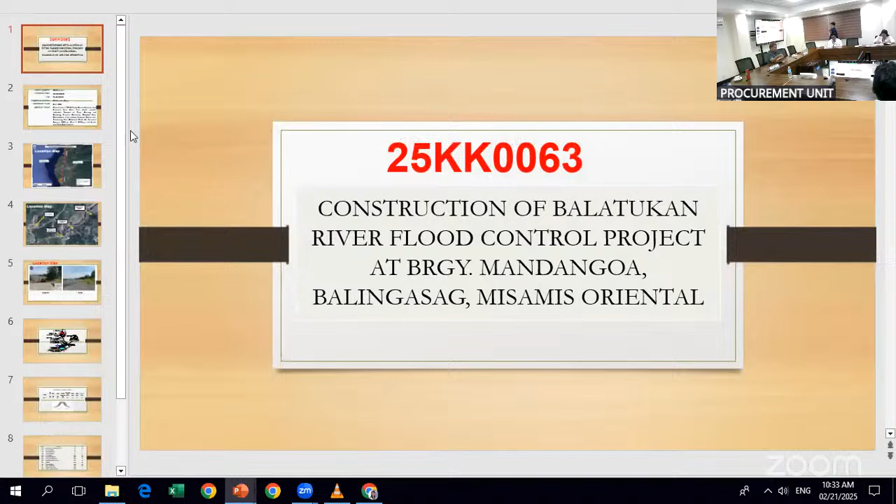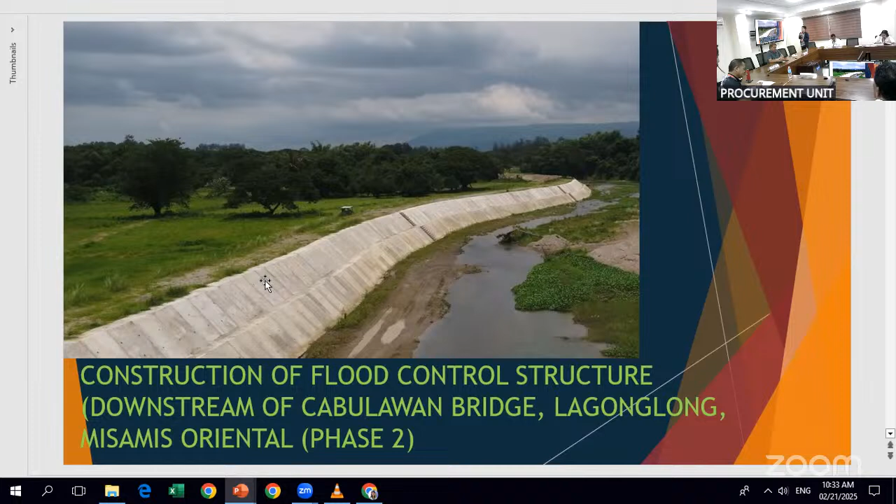Next, please. Contract ID of this project is 25KK0060. Total length is 195 linear meters. Location is Cabulawan, Lagonglong, Misamis Oriental. Appropriation is 100 million.

Approved budget cost of 96,500,000. Project scope is construction of flood control revetment with 12-meter structural steel sheet pile, which includes construction of drainage, RCPC or reinforced concrete pipe culvert, and reinforced concrete box culvert with manhole. This also includes individual removal of trees, clearing and grubbing, structural excavation of common soil, embankment from roadway structure excavation, reinforcing steel deformed grade 40, structural concrete 3,000 PSI class A 28 days, and hand-laid rock embankment.

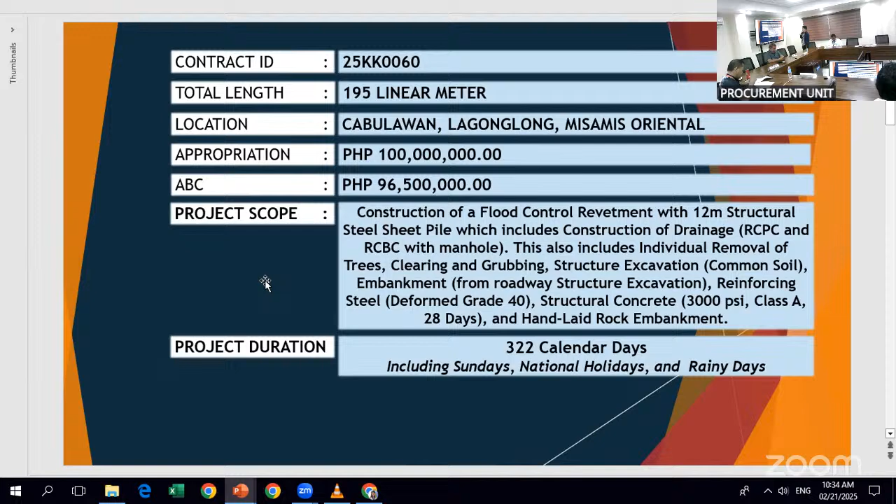Project duration is 322 calendar days. Next, please.

So the scope of this project includes, if we face the sea, construction of flood control 141 meters downstream left side, and construction of flood control 54 meters facing the sea. We have 54 meters right side, and construction of RCPC for this segment. We have 264 meters of reinforced concrete pipe culvert, and construction of box culvert with the length of 320 per segment number 4.

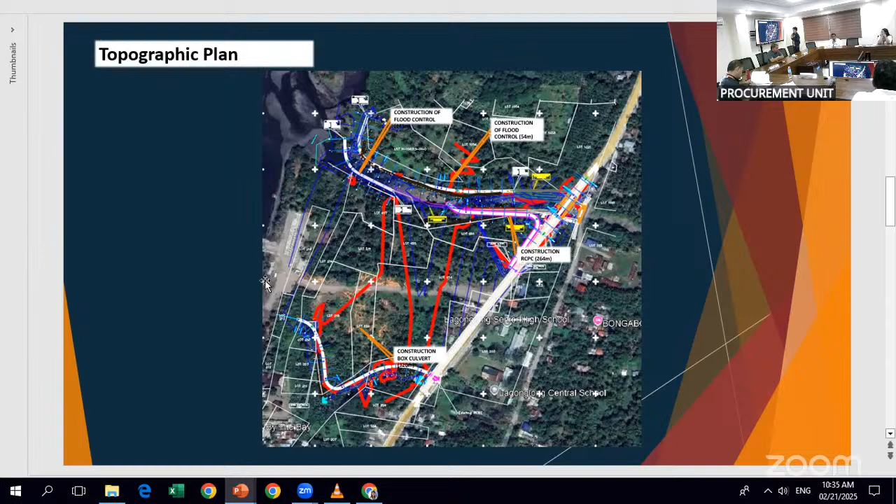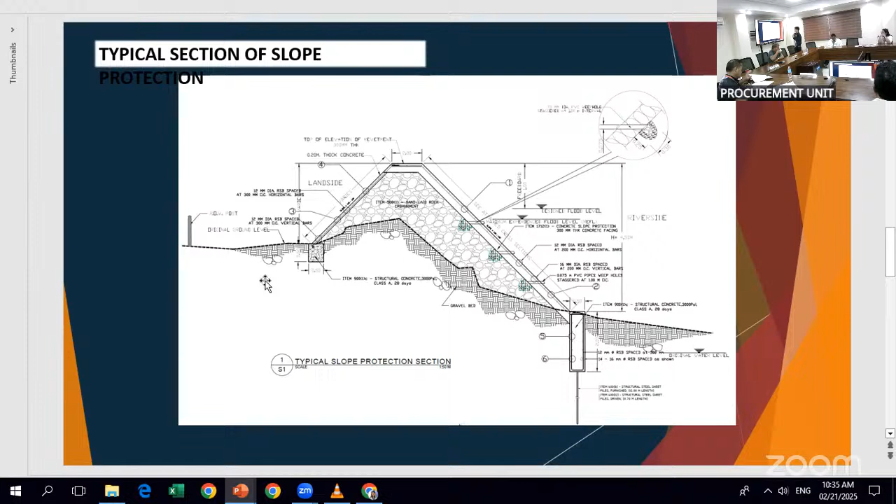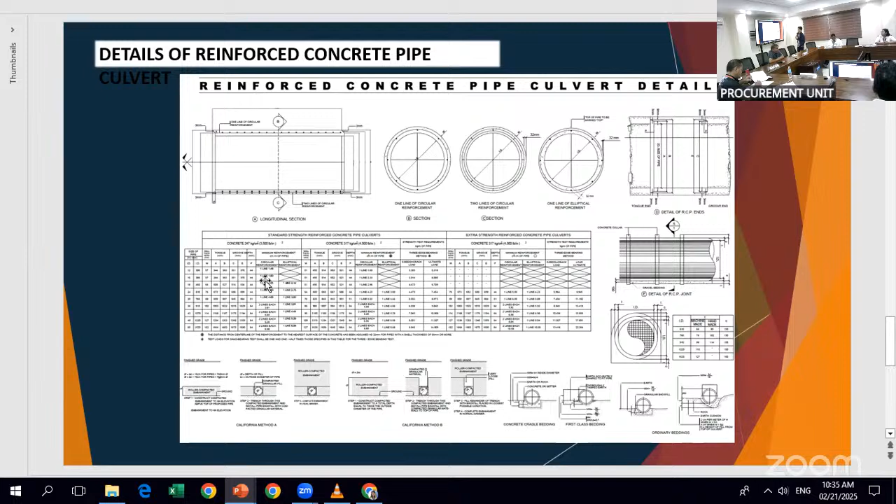Next, please. This is the typical section of our flood control structure, including the 12-meter sheet pile. Next, please. This is the reinforced concrete pipe culvert details, which we will use on the 264 length. Next, please. And this is the details for our box culvert.

Next, please. So for the items that are included in this project, we have provision of field office for engineers. We have project billboard and signboard. We have occupational safety and health program. We have traffic management.

Mobilization, demobilization, individual removal of trees, 301 to 500 mm diameter, clearing and grubbing. We have structure excavation, soft rock, embankment from roadway structure excavation, hand-laid rock embankment, lean concrete, reinforcing steel grade 40, structural concrete 3000 PSI, concrete slope protection, structural steel sheet pile furnish.

We have steel sheet pile driven Z type grade 50, pipe culvert 1220 millimeter diameter, class number 4 reinforced concrete pipe culvert, and then we have metal frames and covers. So that would be all for this project.

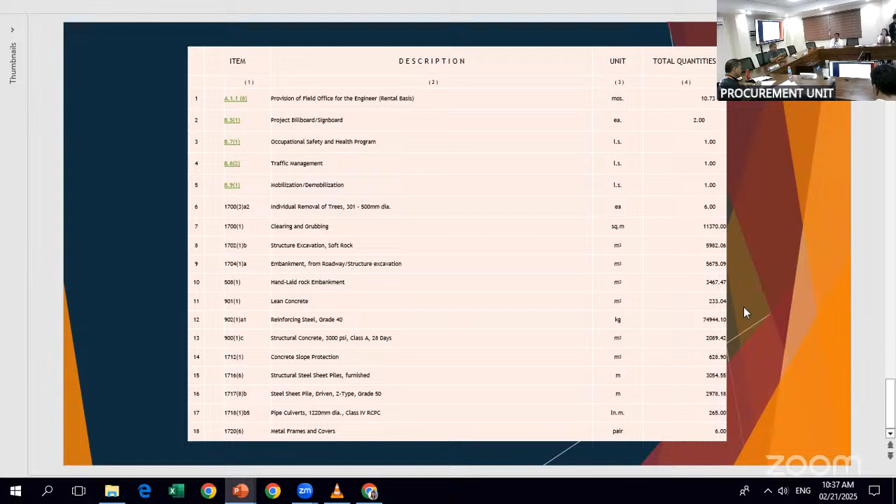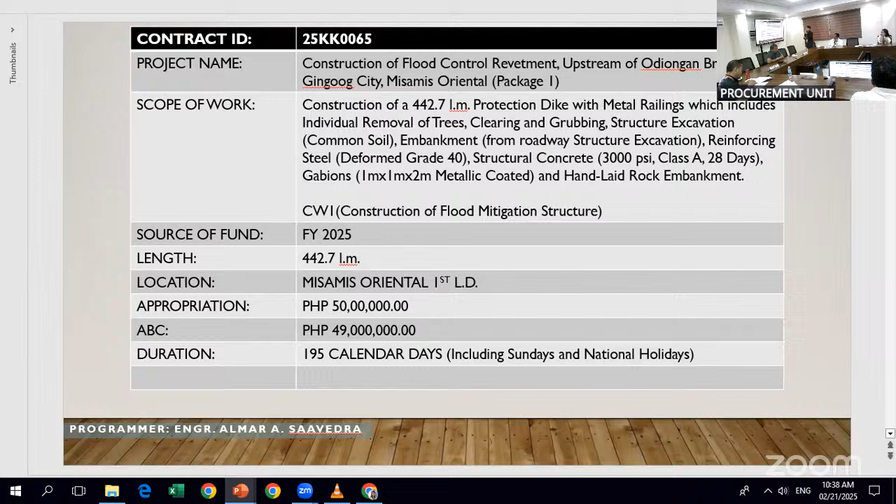Next, please. So this is the location.

So there in a barangay, sa barangay Malibud, our neighboring barangay is Kamanikan. This is the construction of Odiongan Bridge 2 and upstream. We can also see here our proposed structure.

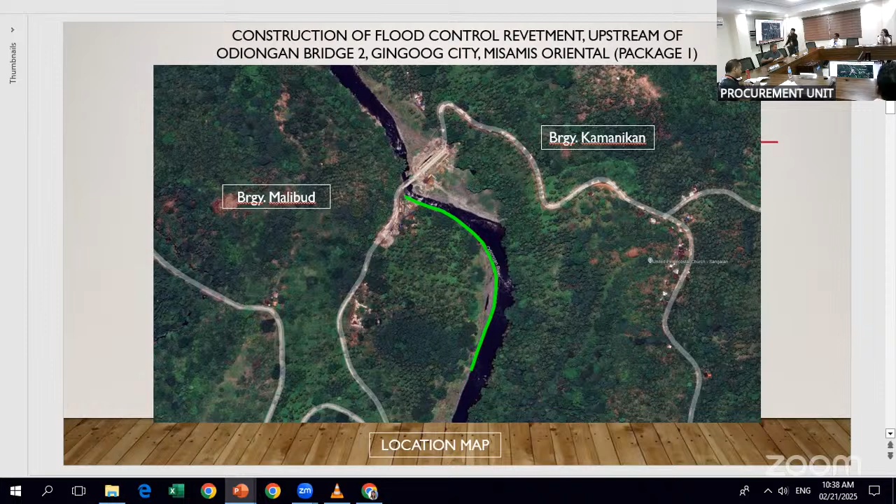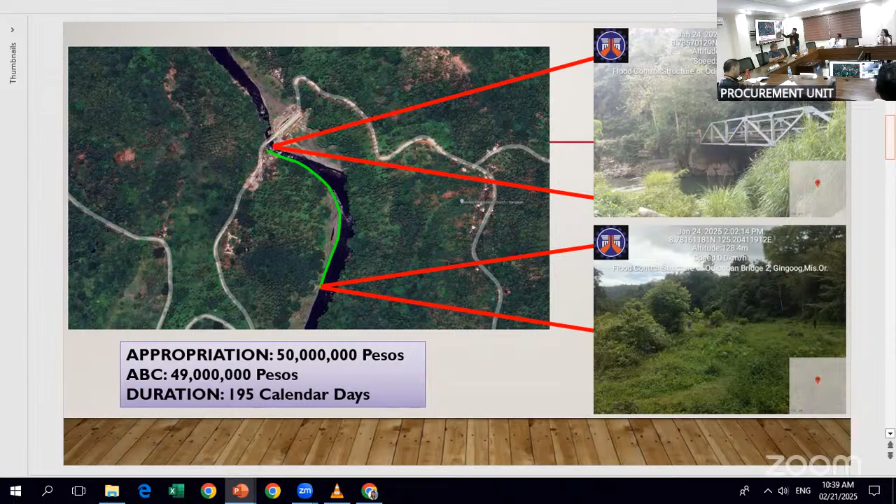Next please. So morning, before we start on the abutments of Odiongan Bridge 2, it will enter somewhere upstream, 442.7 meters above. Next please. So these are some survey photos taken during the survey by our colleagues from the office.

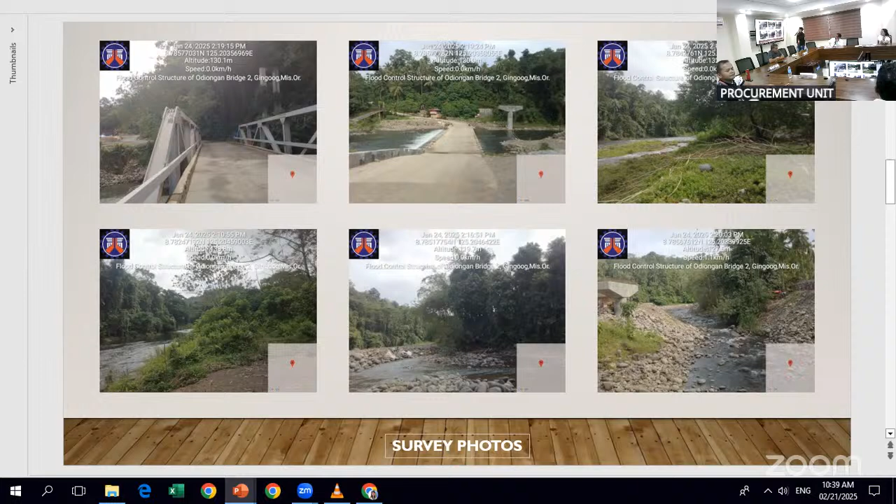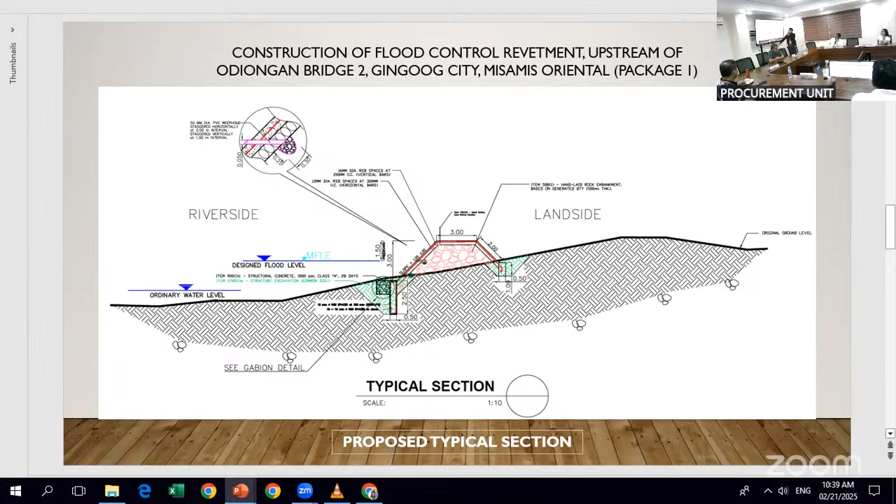Next please. So as we can see, this is the second pier of Odiongan Bridge 2, in which the alignment is our flood control protecting the second pier of our bridge.

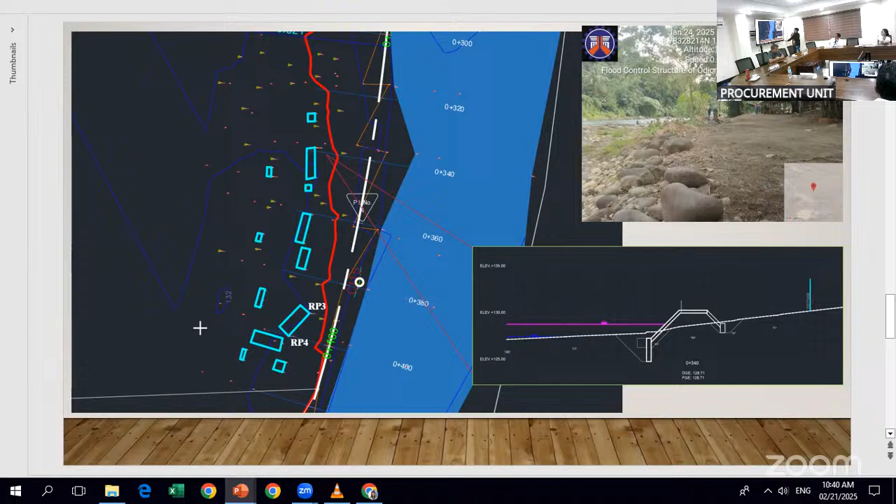Next please. There we can see the silhouettes of rectangles which are existing structures and cottages on our site. The red colored alignment is our flood control. If we look at the cross-section at station 340, the cottage is just a distance from our proposed structure, so we don't need to demolish it.

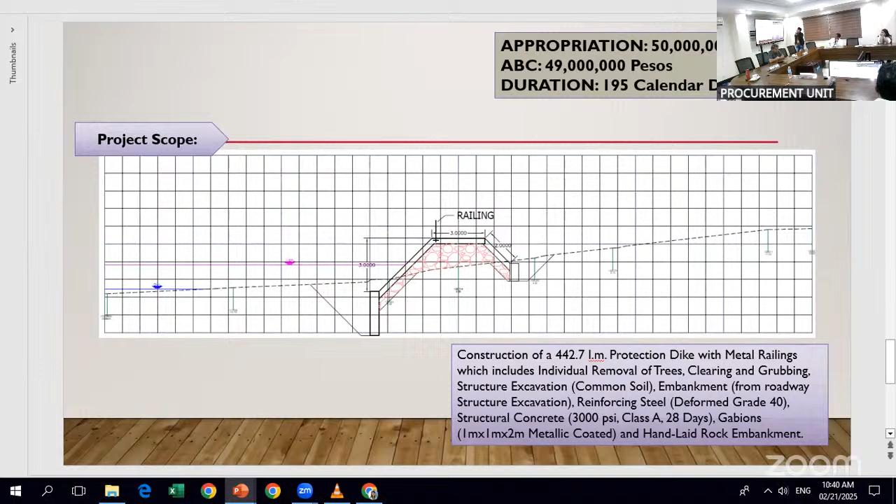So again, this is the scope of work, the appropriation, ABC, and duration.

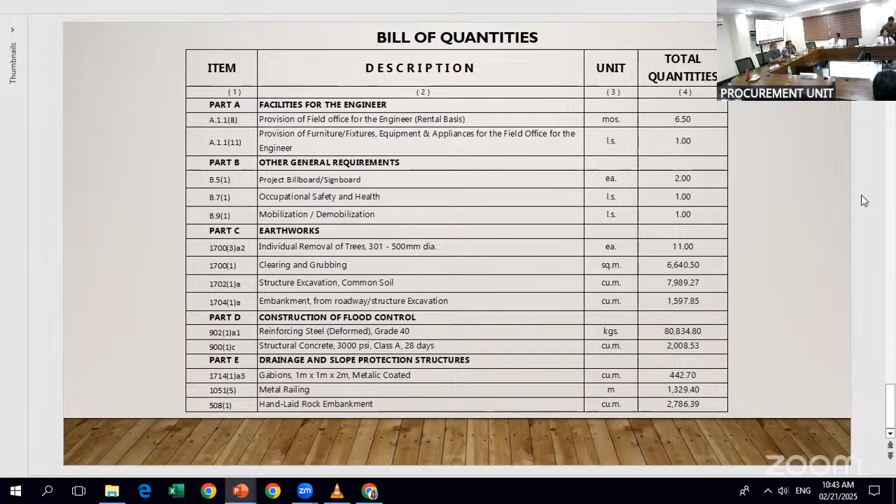Good morning once again, and to the viewers, for the project 25KK0063, construction of Balatukan River Flood Control Project at Barangay Mandangoa, Balingasag, Misamis Oriental.

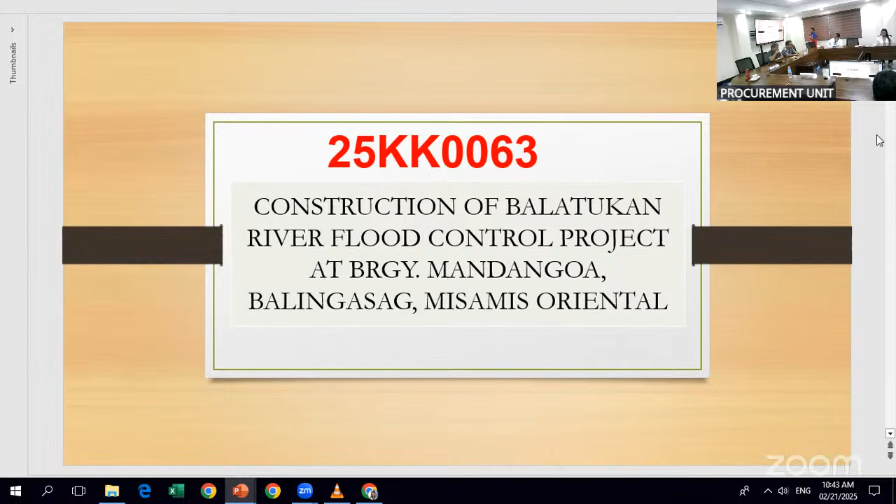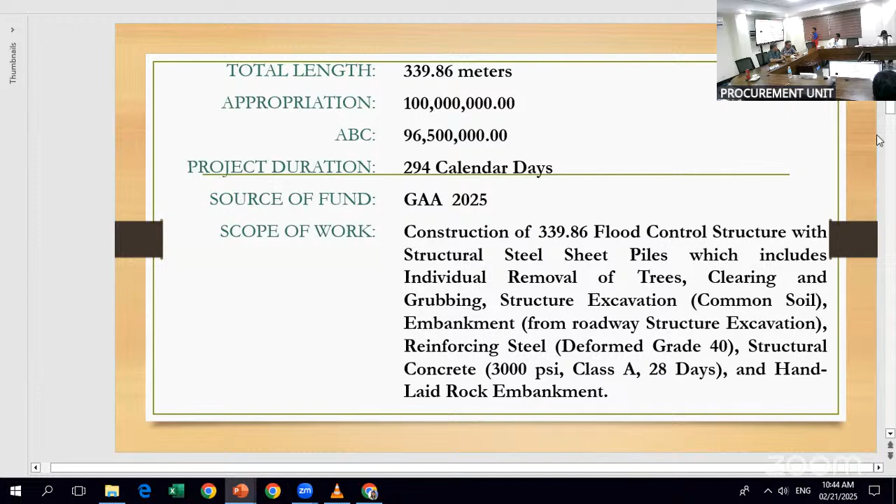The total length of this project is 339.86 meters, with an appropriation of 100 million, ABC of 96,500,000, with a project duration of 294 calendar days. Source of fund, GAA 2025, and scope of work is construction of 339.86 flood control structure with structural steel sheet piles, which includes individual removal of trees, clearing and grubbing, structure excavation, common soil, embankment from roadway excavation, reinforcing steel deformed grade 40, structural concrete 3,000 PSI class A 28 days, and rock embankment.

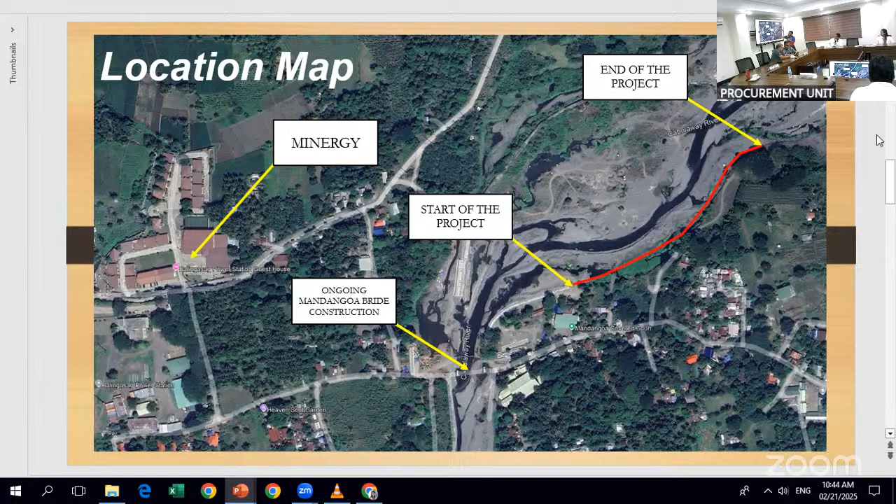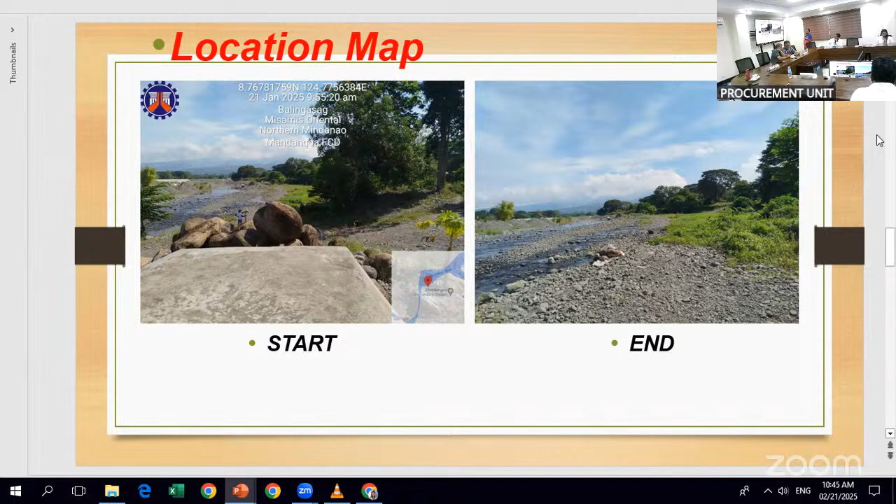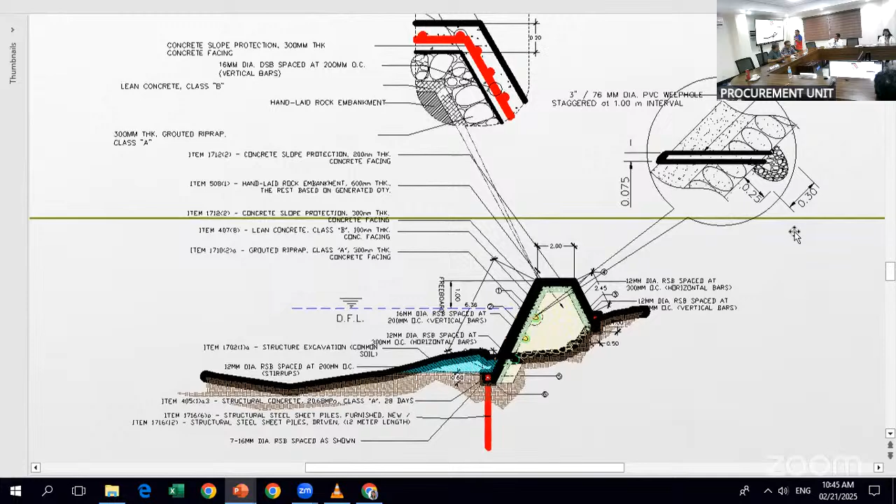Next. This is the design of the project, with a top berm of 2 meters and land side length of 2.45, with a riverside of 6.36 meters. It has a 12 meter sheet pile with Z-type sheet pile. Next please.

These are steel sheet piles, Z-type, grade 50.

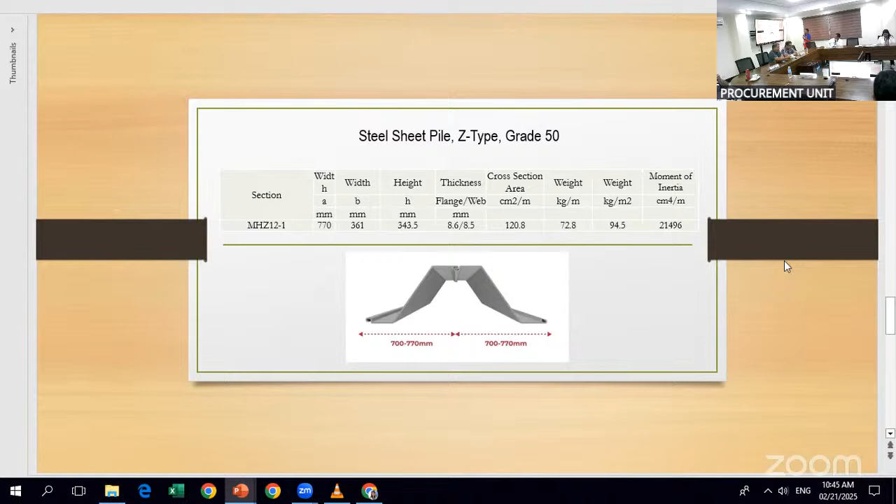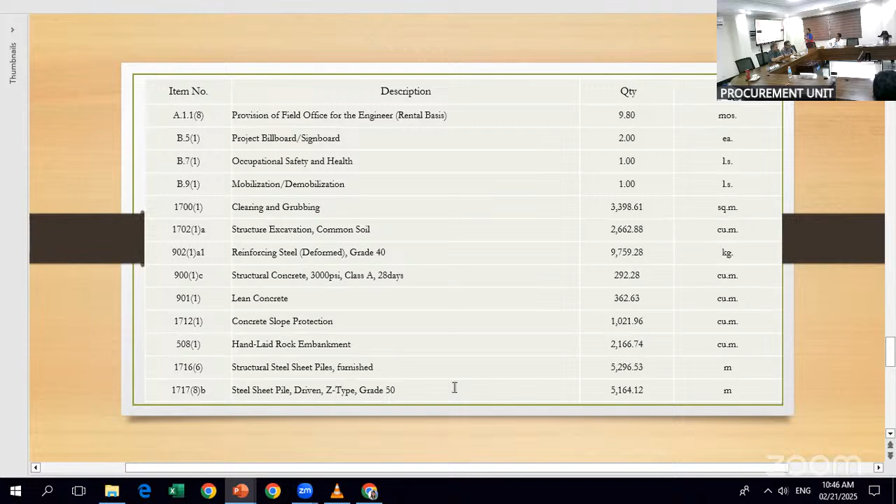Hand-laid rock embankment, 2,166.74 cubic meters. Structural steel sheet piles, furnished, 5,296.53 meters. Steel sheet pile driven Z-type grade 50, 5,164.12 meters. Next, that's all, thank you.

So, that's clear, right? So, any questions?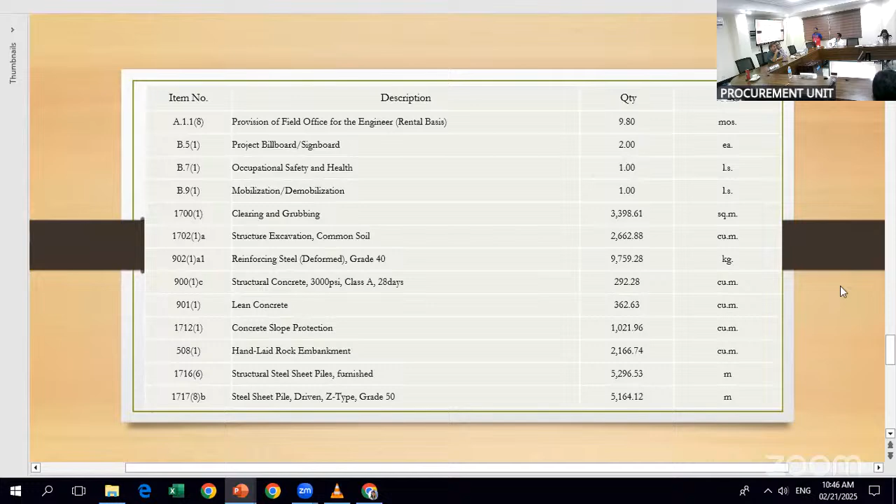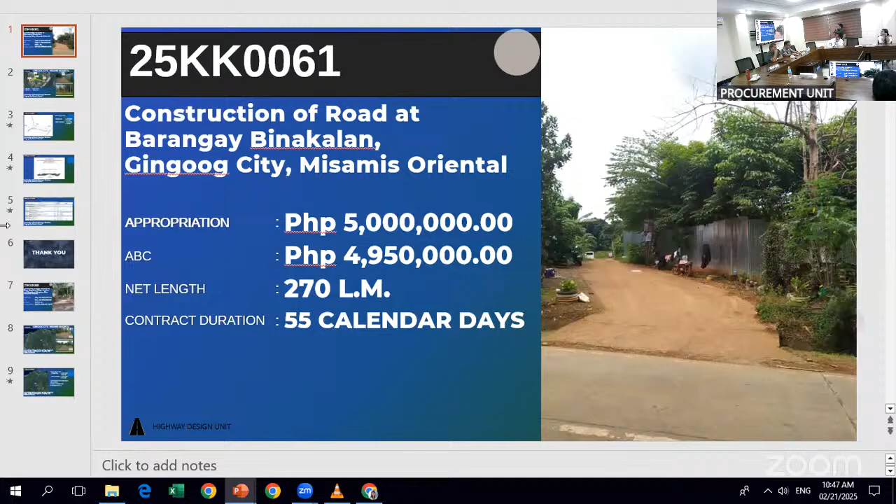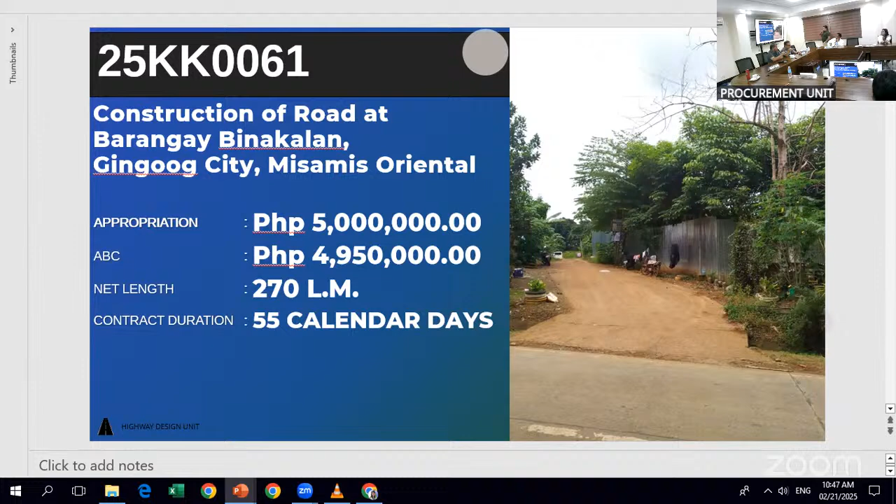For the next project, 25KK0061: construction of road at Barangay Binakalan, Gingoog City, Misamis Oriental, with an appropriation of 5 million and an ABC of 4,950,000, with a net length of 270 linear meters and 55 calendar days.

Location is in Gingoog City, Misamis Oriental. There are two segments: Segment 1 is 200 meters, while Segment 2 is only 70 meters, with beginning and end points for the project.

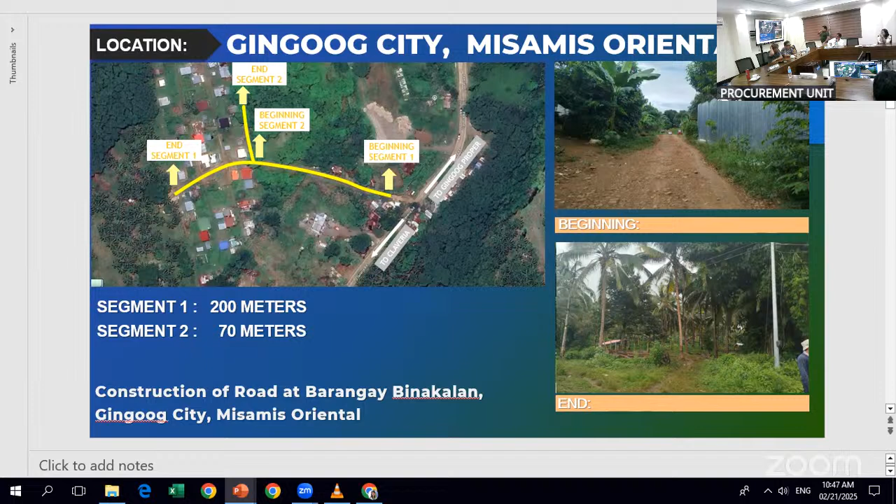For the scope of work: concreting the road, carriage width is 5 meters with a thickness of 0.2. Gravel shoulder is 1 meter width, and thickness is 0.15.

For the typical section: Segment 1 from station 0 to station 200, Segment 2 from station 0 to station 70.

Surplus common excavation, 664.91 cubic meters. Embankment from structure excavation, common soil, 453.94 cubic meters. Subgrade preparation, 2,160 square meters.

Aggregate subbase course, 483.3 cubic meters. Gravel surface course, over shoulder, 91.8 cubic meters. And for the carriageway, Portland Cement Concrete Pavement, 14 days, 1,350 square meters. That's all.

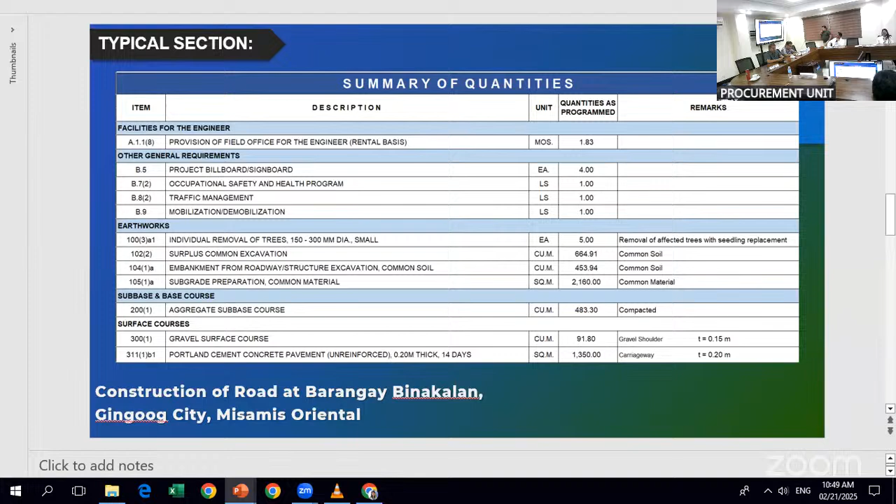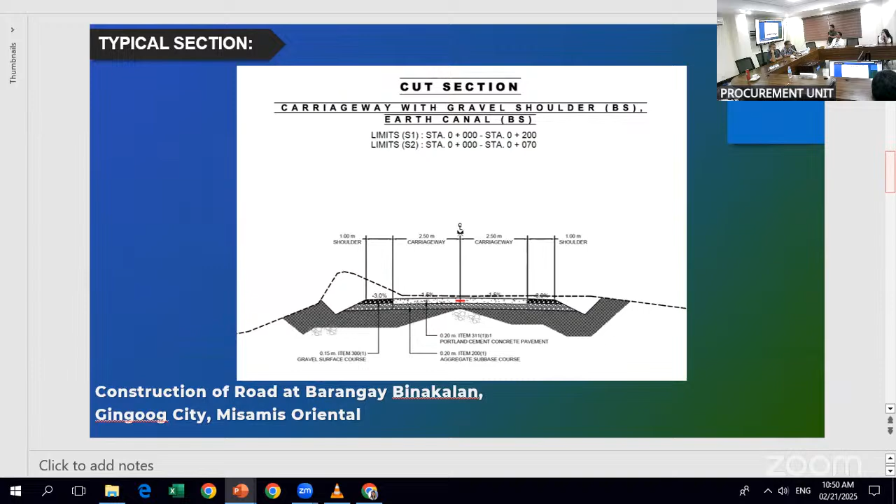Okay, with left and right, sir. Okay, so next project, last one.

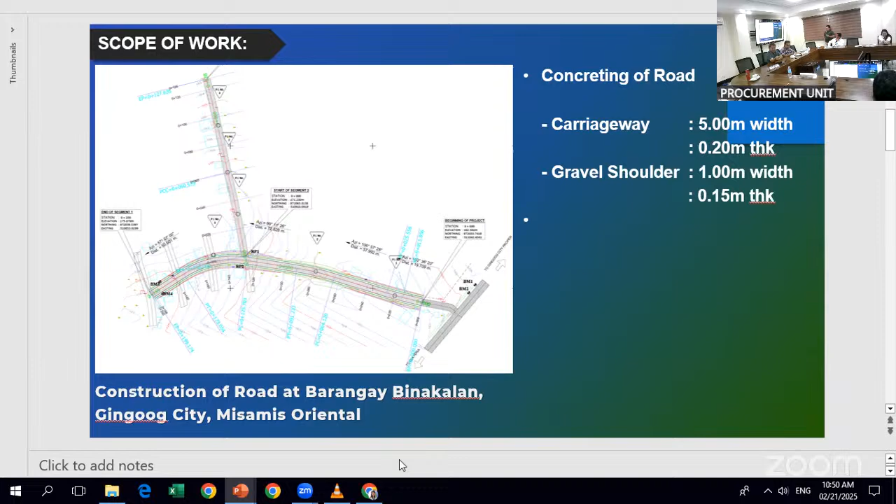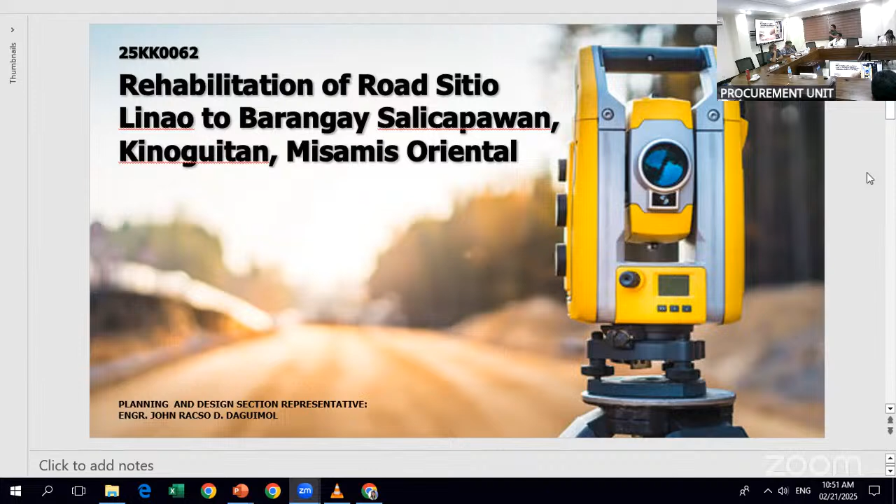The last project, 25KK0062, rehabilitation of road Sitio Linao to Barangay Salicapawan, Kinoguitan, Misamis Oriental, with an ABC of 4,950,000. So two segments as well.

Segment 1 is station 0 to station 111, equal to 111 linear meters. Segment 2 is station 0 to station 134, equal to 134 linear meters, with a total of 245 linear meters.

Featuring a total carriage width of 5 meters, constructed with PCCP having a thickness of 0.2. The road shoulder will be 1 meter wide, left and right as well, also paved with PCCP and will have a thickness of 0.15 meters. In addition, the scope of work includes removal of trees and removal of existing damaged carriageway.

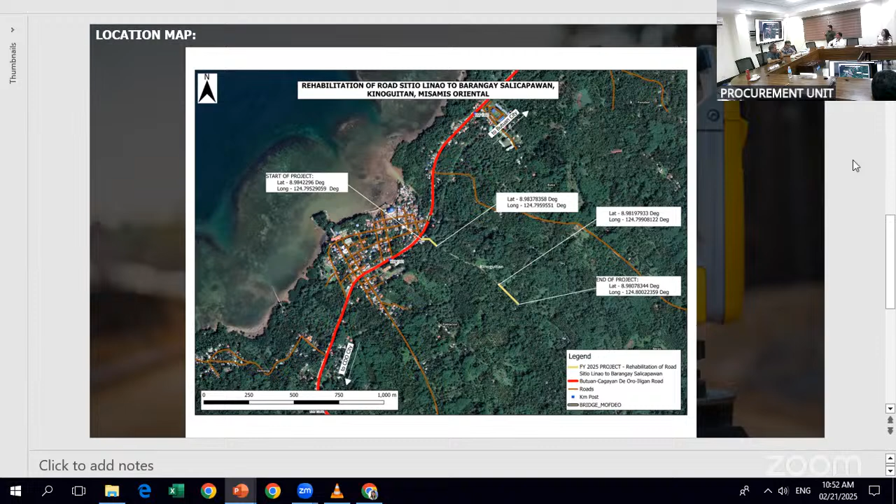For the bill of quantities: provision of field office for the engineer, 1.83 months. Project billboard for occupational safety and health, 1 lump sum. Traffic management, 1 lump sum. Mobilization or demobilization, 1 lump sum.

Individual removal of trees, 51 each. Removal of aquatic structures or obstruction, 0.2 meter thick PCCP, 555 square meters. Surplus common excavation.

1,492.98 cubic meters. Embankment from roadway structure excavation, 0.61 cubic meters. Subgrade preparation, common material, 1,715 square meters. Aggregate subbase course, 401.8 cubic meters.

For the shoulder, PCCP 0.15 thick, 490 square meters. And for the carriage width, 0.2 thick, 1,225 square meters. That's all, sir.

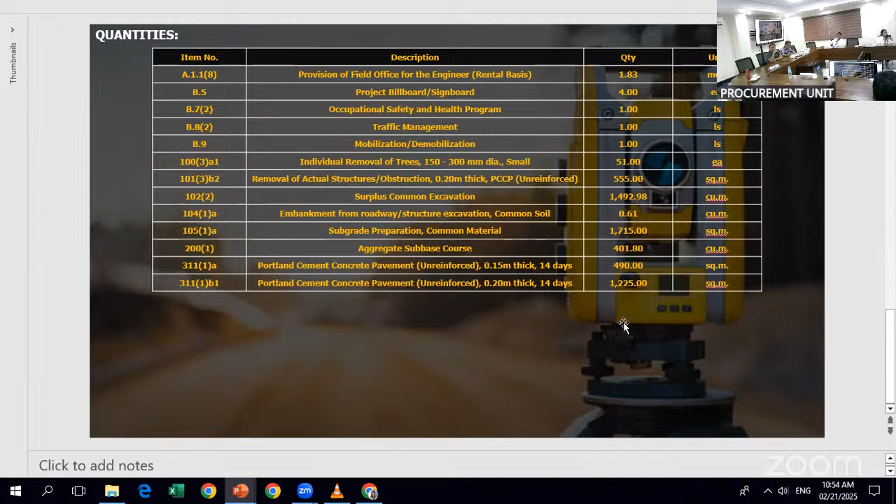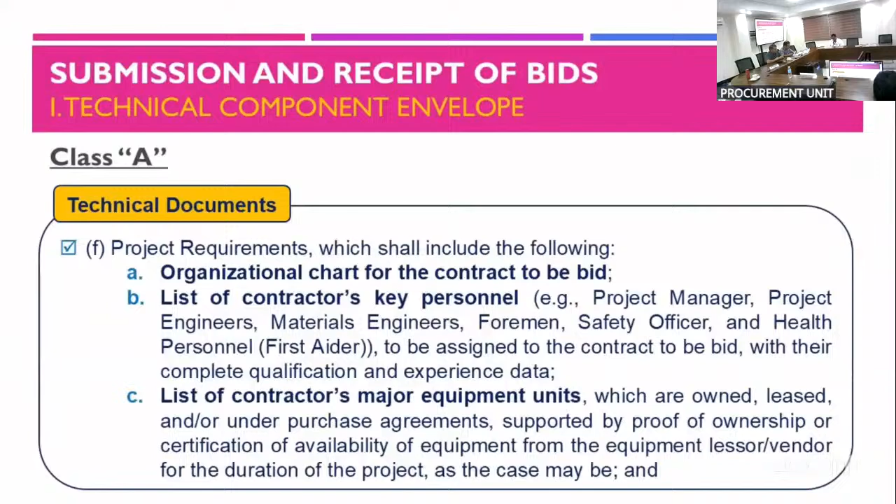as the case may be. Contractors' key personnel: the key personnel should meet the following number of years' work experience. The experience means total years of civil works experience of any nature in construction and engineering consultancy service.

Include the tax identification number, or TIN, of the key personnel. Compliance with D.O. 98 series of 2016, revised guidelines on the accreditation of contractors or consultants materials engineer, and to include the contact number of the materials engineer.

Compliance with D.O. 148 series of 2024, guidelines on the accreditation and assignment of contractors and consultants project engineer.

If a proposed key technical personnel is an employee of the bidder and working on another project at the time of the bidding, the bidder shall submit certification that, one, the personnel will be pulled out from the ongoing project once the bidder is awarded the contract.

And two, he or she will be replaced with another person with equal or better qualifications as certified by the head of the implementing office, pursuant to Department Order Number 9, Series of 2012. The proposed key personnel and replacement must be named in the bidding document.

The key personnel required are the following: one project manager with 5 years of general experience and 5 years of relevant experience. Note that a valid and updated government-issued ID with 3 signatures should be attached.

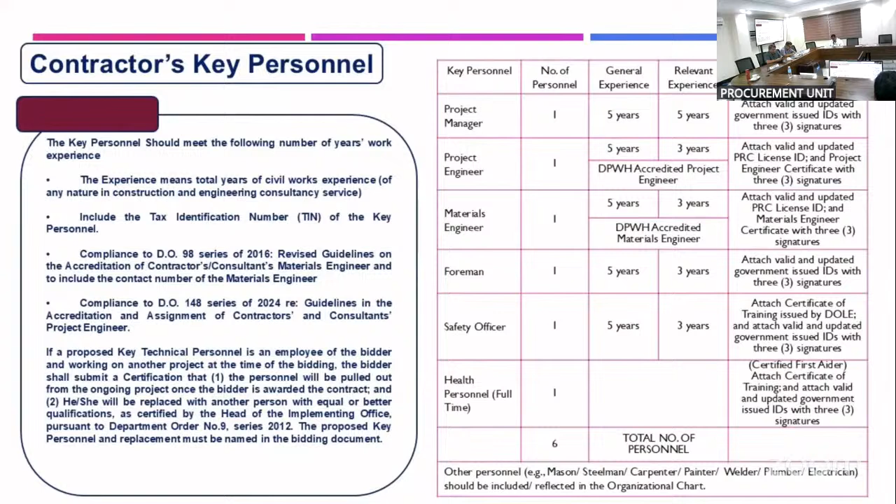Note that a certificate of training and a valid and updated government issued ID with 3 signatures should be attached. All in all, there should be 6 total number of personnel. Other personnel, such as the mason, steelman, carpenter, painter, welder, plumber, or electrician, should be included or reflected in the organizational chart.

Contractors' major equipment needs: the contractor is required to provide proofs of ownership and other supporting documents for equipment owned, lease agreements for equipment to be leased and/or under purchase agreements, supported by certificate of availability of equipment from the equipment lessor or vendor for the duration of the project. Proofs of ownership and other supporting documents for equipment pledged must specify and indicate the model or name, capacity, performance, or size, plate number, motor number or body number, chassis serial number, engine serial number, specific location and condition per Department Order 58, Series of 2012.

Contractors' minimum materials testing equipment: please refer to DO number 11, Series of 2017, for the minimum material testing equipment. DPWH Procurement Manual Volume 2, Infrastructure Main Guidelines, specifically requires the submission of the materials testing equipment as stated in Clause 5.6.2.a Technical Proposal and Clause 5.6.2.a.4.c Project Requirements, using Form DPWH INFR 15 - list of contractors' major construction and laboratory equipment units to be assigned to the contract, supported by certifications of availability.

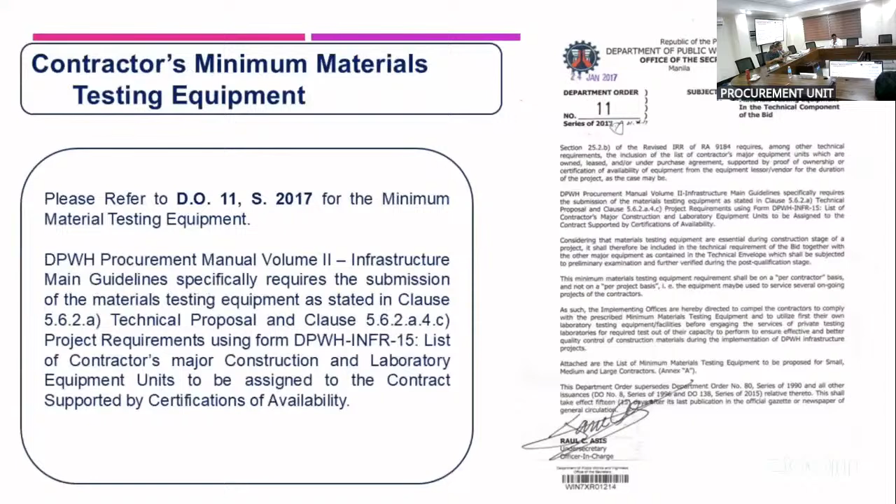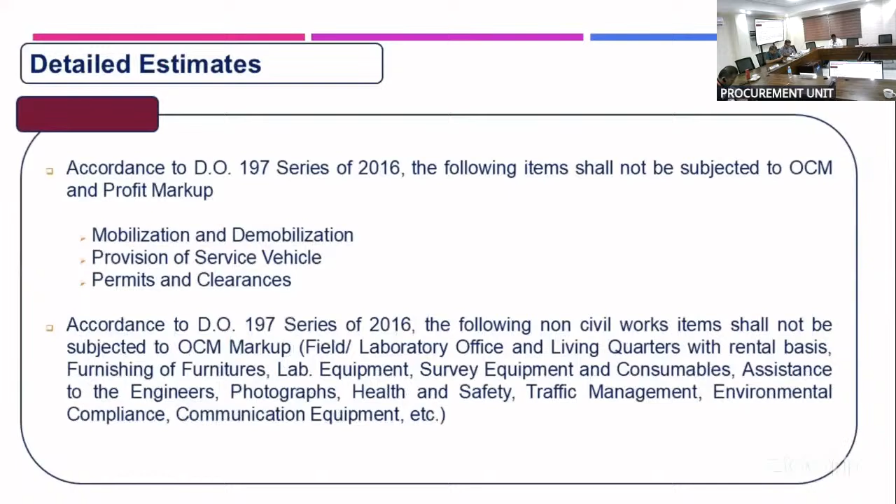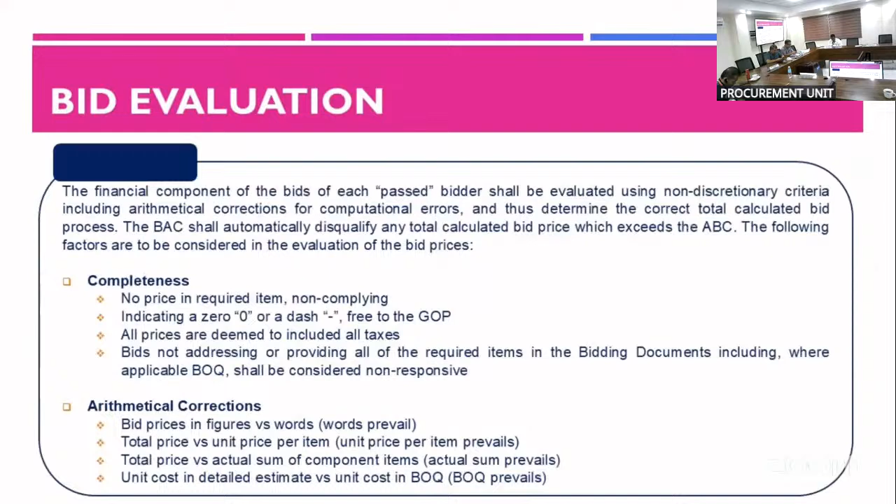Post-qualification: verification of legal requirements, licenses, certificates, permits, non-inclusion in blacklist.

Verification of technical requirements: key personnel where minimum work experience requirements should be satisfied, availability and commitment of major construction equipment and materials or laboratory equipment, and performance in ongoing government and private contracts.

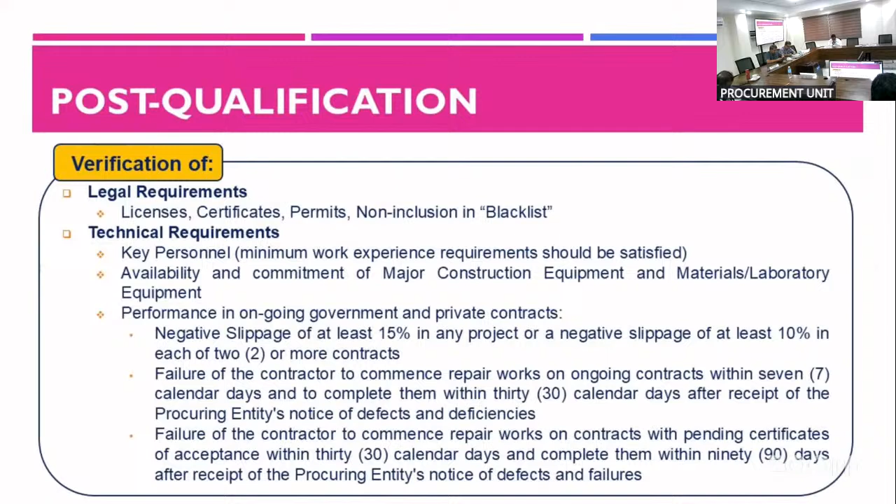Negative slippage of at least 15% in any project, or a negative slippage of at least 10% in each of 2 or more contracts. Failure of the contractor to commence repair works on ongoing contracts within 7 calendar days and complete them within 30 calendar days after receipt of the procuring entity's notice of defects and deficiencies. Failure of the contractor to commence repair works on contracts with pending certificates of acceptance within 30 calendar days and complete them within 90 days after receipt of the notice of defects and failures.

Verification of technical requirements: substandard quality of work as per contract plans and specifications, or unsatisfactory performance of contractors' obligations as per contract terms and conditions at the time of inspection.

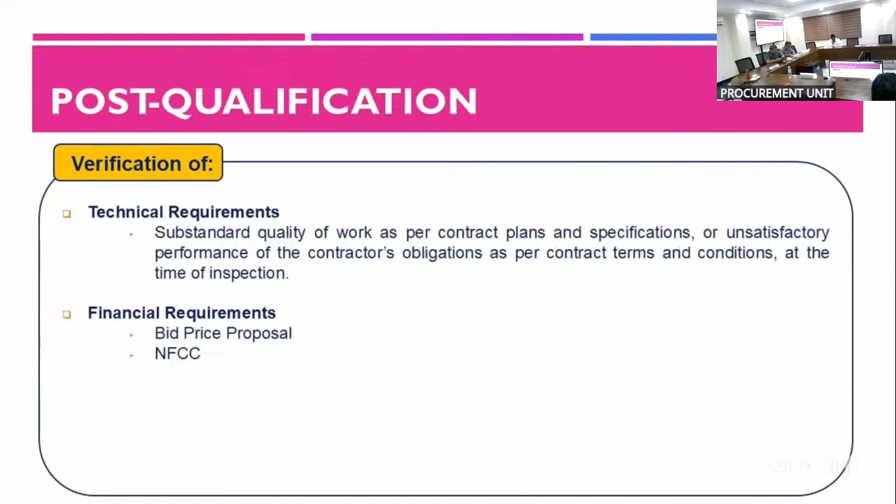Verification of financial requirements: bid price proposal and NFCC.

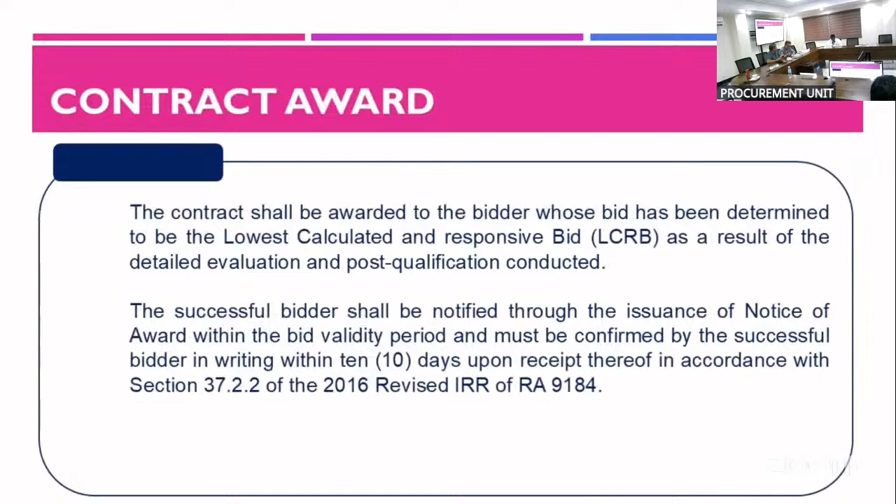Contract award: the contract shall be awarded to the bidder whose bid has been determined to be the lowest calculated and responsive bid, or LCRB, as a result of the detailed evaluation and post-qualification conducted. The successful bidder shall be notified through the issuance of notice of award within the bid validity period and must be confirmed by the successful bidder in writing within 10 days upon receipt thereof, in accordance with Section 37.2.2 of the 2016 revised IRR of RA 9184.

Common reasons for rejection of bids, ineligibility, and post-disqualification of bids: 1. Failure to submit the original copy of the surety bond certified by the Insurance Commission indicating the name of the procuring entity and name of contractor. 2. Shorter bid validity and bid security validity period.

3. Overlapping of pledged equipment and committed key technical personnel. 4. Failure to indicate the validity of bid in the bid form. 5. Late submission of bids. 6. Failure to submit supporting documents, such as the certification of availability of equipment from the equipment lessor or vendor for the duration of the project, if equipment pledged is to be leased or purchased.

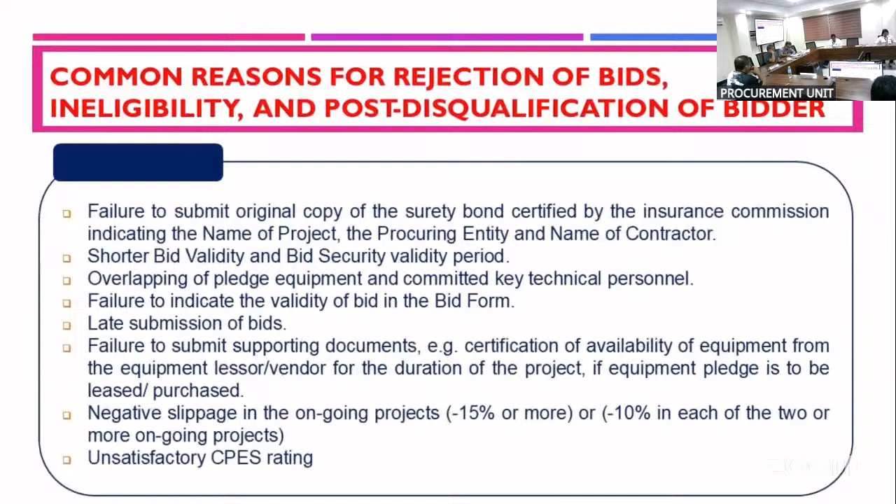7. Negative slippage in ongoing projects: negative 15% or more, or negative 10% in each of 2 or more ongoing projects. 8. Unsatisfactory performance rating. 9. Incomplete pages of bid documents. 10. Authority of the signatory to sign on behalf of the bidder.

For a single proprietor, the signatory should be the owner or proprietor only. For a corporation or cooperative, board secretary's certificate and board resolution are required. For a joint venture, the joint venture agreement. For a partnership, as indicated in the articles of partnership.

That is all. Thank you.

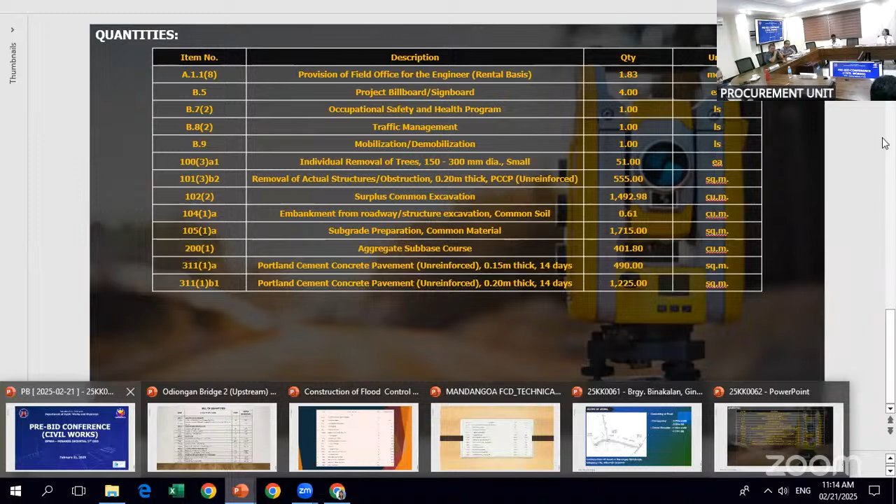For the receipt of bids, the deadline will also be on March 6, 2025 until 10 a.m. The schedule for the opening of bids will be on March 6, 2025 at 10 a.m., immediately after the submission of bids.

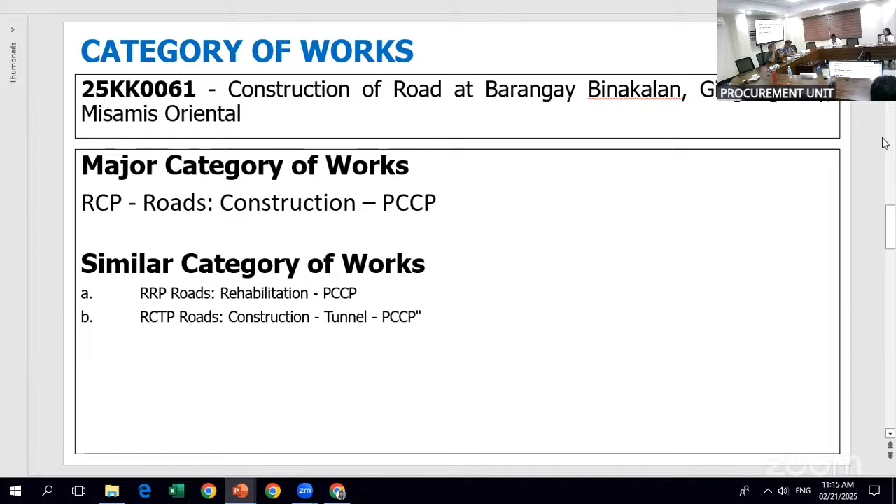For the required category of works: for contract ID 25KK0060, the required category is FCSPS, or flood control construction, flood protection using structural measures, example equipment, structures, and plant. For 25KK0061, the required category of work is RCP, or Roads Construction PCCP.

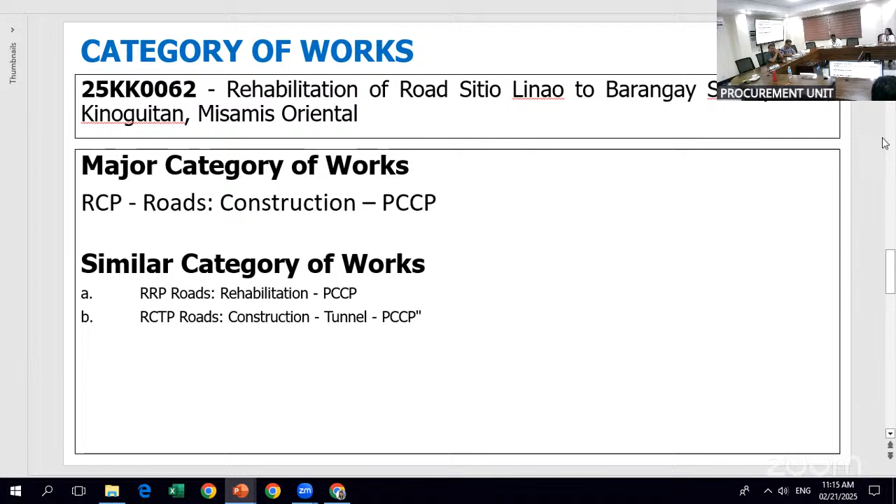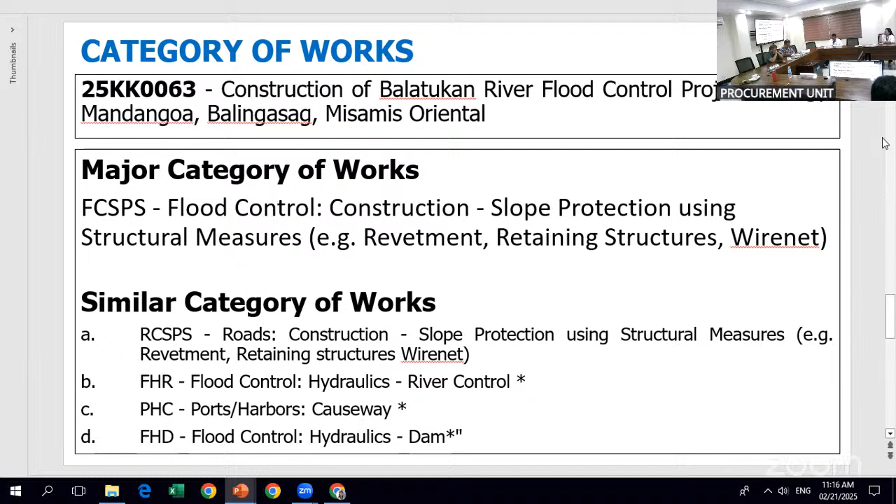Same for 25KK0062, the required category of work is RCP. And for 25KK0063, the required category of work is FCSPS. And also for 25KK0065, the required category of work is FCSPS.